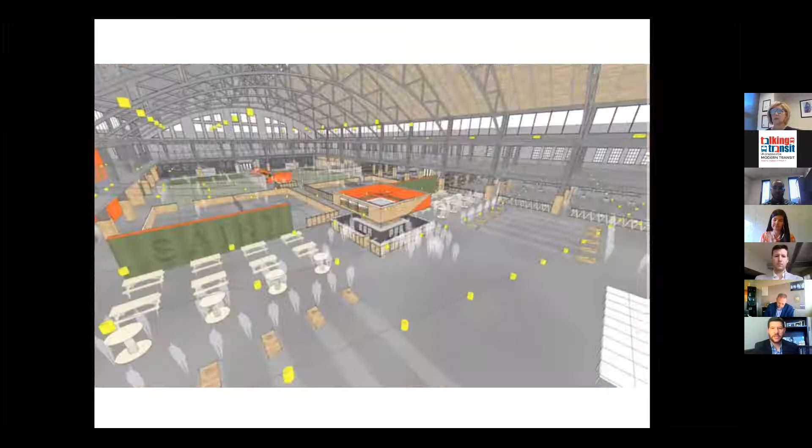To the south of the City Foundry is the Armory building, which had been vacant for some time, but now Green Street Development has already invested $15 million on the exterior with an 80,000 square foot new roof. All the tuck pointing and new windows have been installed. Coming online in 2023 will be Rec Hall, which will feature backyard games and recreational activities, totaling 200,000 square feet.

Here's the latest development announced from Green Street, just to the east of the Armory project. Two new tower buildings, each 13 stories, will be connected to the Grand Bridge and Grand Boulevard, featuring over 500 apartment units. You can see Market Street extending through to those apartment units.

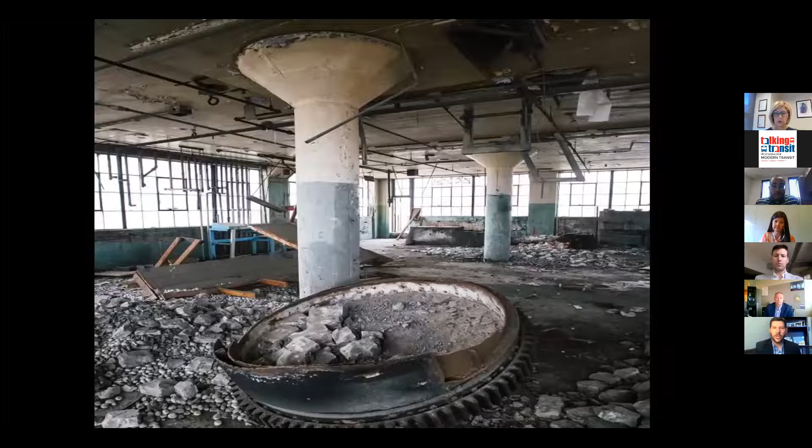To the east of Grand Boulevard is the old Steelcote building, vacant since 1972. This was our first building to actually come online within the redevelopment area, with 33 apartments as part of the Steelcote Lofts. Michael Hamburger with Pier Property Group took on this project and also converted the building to the south into 15 micro unit apartments with 5,500 square feet of commercial space — here are the before and afters of what's been accomplished with those two buildings.

The new construction building is the 3rd phase, called the Steelcote Flats building, which is fully under construction and will come online in winter 2022.

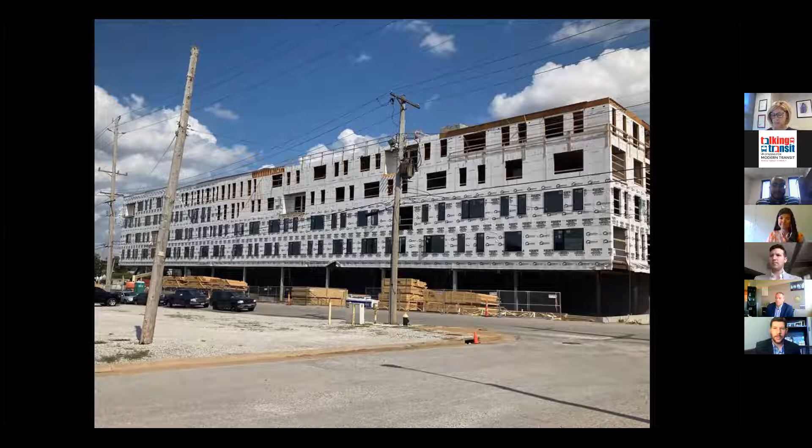Michael Hamburger is just announcing his 4th project in the area, called the Edwin, which will be on Grand Boulevard, right next to the famous Del Taco restaurant on the corner of Grand and Chouteau. It will have 192 apartment units with 65,000 square feet of commercial space on the ground floor.

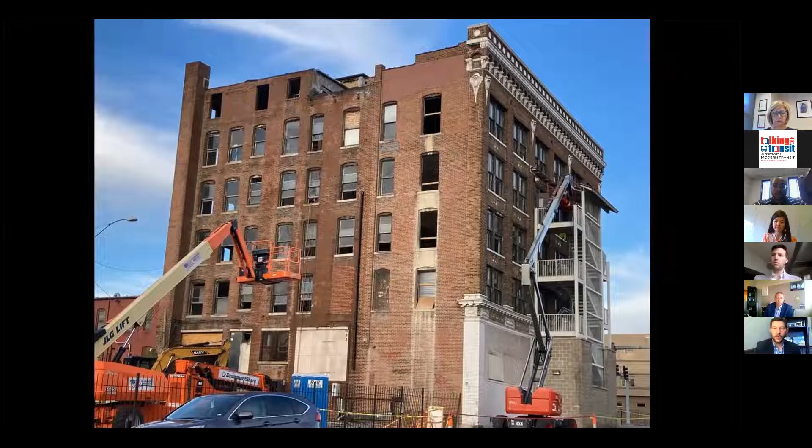Moving southward, this building was able to be saved at Grand and Park Avenue. The Redevelopment Corporation has an outstanding record of historic preservation and being able to save some of these great buildings in Midtown. This is called the Nicholas Building, now fully under construction with the old fire escape removed. It will have 32 apartment units with a ground floor restaurant.

We work closely with the neighborhoods adjacent to the redevelopment area, including Gate District West and the Tiffany neighborhood, and any developments proposed in that area are approved by those neighborhoods. Here's a perfect example: St. Louis University turned over 48 lots in the neighborhood to the community, and the community decided to go ahead with an RFP process, bringing in home builders — Builderama here with 40 new homes and 12 condos currently under construction.

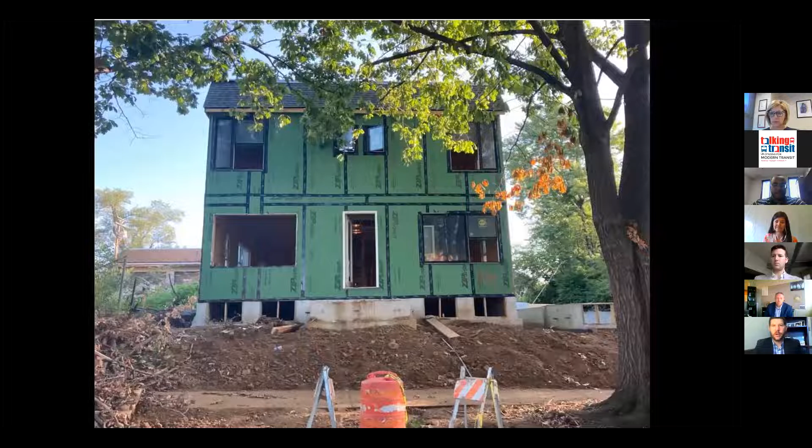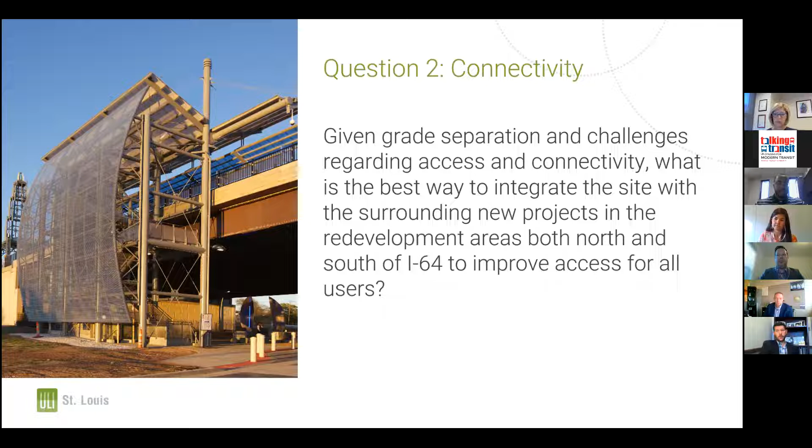Third question is, of course, around land use. Wouldn't be the Urban Land Institute without us thinking about what is the highest and best land use in this area. And so given all these redevelopments and the Redevelopment Corporation's vision to turn this area into a district and give it some sense of place, what are the highest and best uses for this site?

Recognizing that surrounding areas have very unique development character, we were tasked with identifying a redevelopment identity for the site, and then how the site can become an asset for the surrounding areas and neighborhoods, particularly those north and south of the site.

That was something we put a lot of focus on. The last one emphasizes transportation. There's a lot of transportation in this area - we've got Brickline Greenway, the Grand MetroLink station, and the Grand Metro bus, which is the busiest route in the system. So how can redevelopment opportunities leverage those transit assets to create a successful redevelopment for the station area?

So with that, I'm going to turn it over to Toyin to go through some of our considerations as well as the process a little bit further.

Hi. So we started the process off by going over some of the documents provided to the team that discussed what was going on in the area, some of the different projects already in motion, and took all of those things into consideration with our discussion at the end of the day.

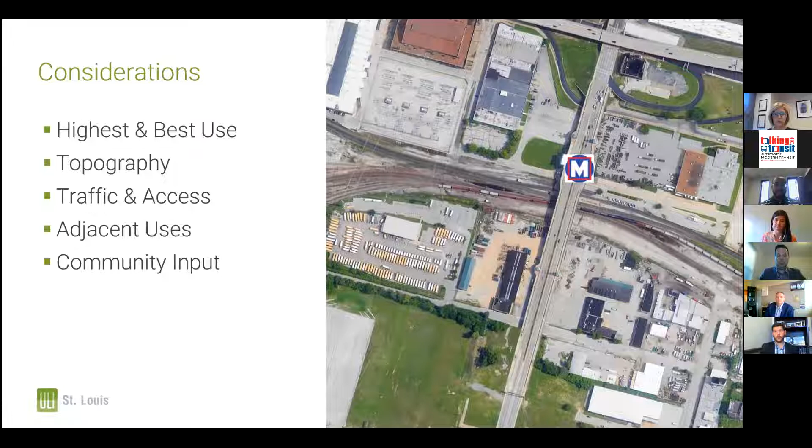A few of our insights were that the area was not very walkable, with lots of fast traffic going up and down Grand. We realized that Grand is a connection point for many transit riders, and that station was going to be really important in relation to what was coming in for the area, both north and south of the highway there.

There was really no great sense of place considering the centrality of the point. Basically, this site didn't offer much to the surrounding area. It was kind of buried, underground or under the highway there, or under Grand, and didn't really offer much to the location around it.

Safety and security was an issue. The wayfinding was really inadequate - when you're at the site, you really don't know what is accessible or how to get there. So that was part of our process as well.

We talked about the connections from the MetroLink stop to the MetroBus and the different points north and south, and how they were challenging to that location.

We also took into consideration increased development attention in the area and the different businesses coming in, and we wanted to make sure they were connected - how we can make sure this site is connected to what's coming in down the line.

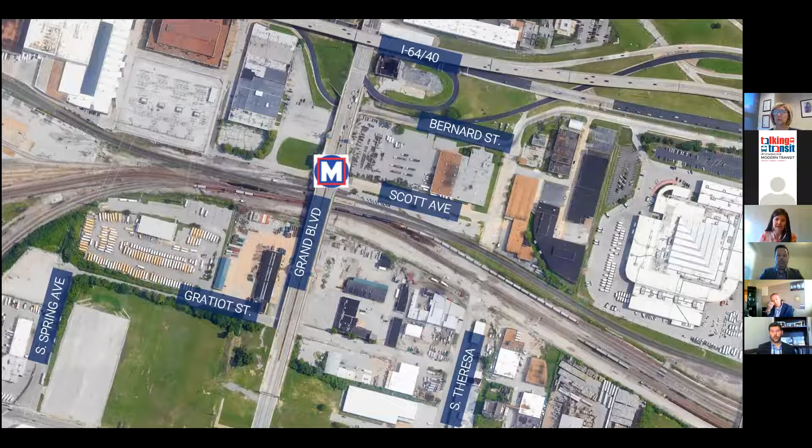A view from SLU looking north towards the Grand Viaduct shows a lot of current green space. We had a lot of conversation about maintaining that sense of connectivity and open space as these sites get developed. You can also get a feel here for the scale of the gap between the Grand District to the north and SLU to the south, and really wanting to stitch these spaces better together.

The MetroLink stop itself has great opportunity for improved wayfinding and overall experience. We had a lot of conversation about wanting to make sure that feels very accessible and approachable, and thinking about ways to do that—the station itself, just thinking about how we can make a more comfortable place for people.

Today, the MetroLink stop really functions just for that kind of transit transaction. We had a lot of conversation about, in between wait times, making these stations—both below Grand and above at the bus stop—much more people places, comfortable hangout places, thinking about ways to incorporate that in the future.

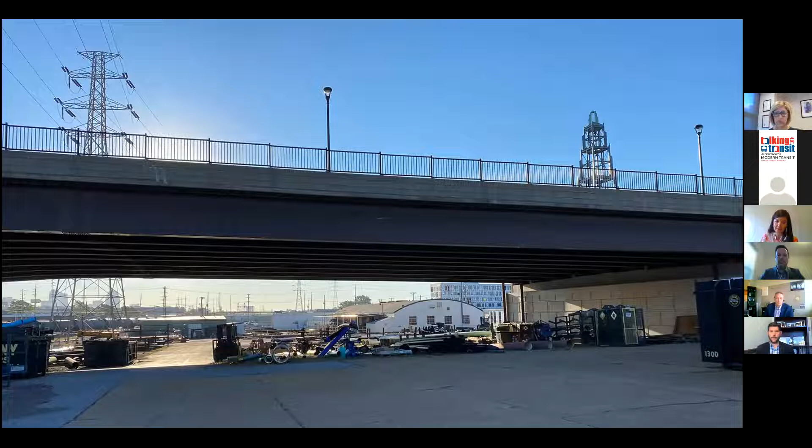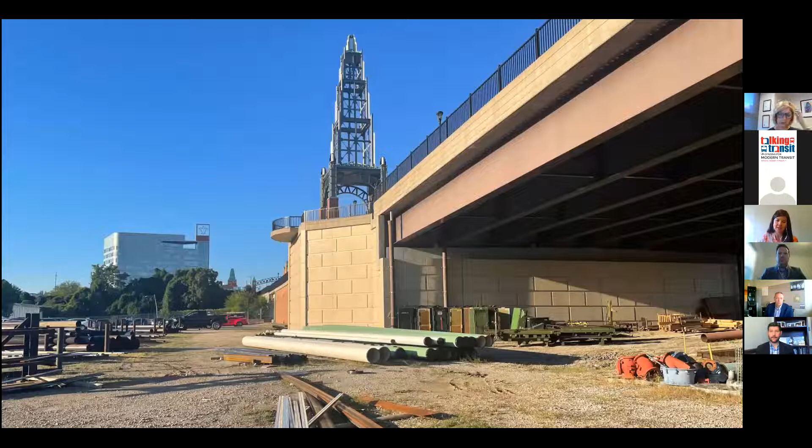This is also Gratiot under Grand. There's a lot of varying uses for the spaces under Grand—existing traffic and transportation connections, as well as some industrial uses, as you'll see in the next couple of slides. Existing landowners use some of that covered area for storage, which is a great alternative use, but we're also thinking about how to better activate those spaces in the future. There's such a significant elevation difference to facilitate the train activity that happens underneath, but we really want to make that a more fluid transition from high to low.

Lots of barriers to overcome, which you will see in our recommendations. In this image, you can see the armory in the far left, currently used as a bus facility substation. There's a lot of existing uses that will continue to stay there over time—obviously the substation isn't going anywhere, the train line isn't going anywhere—so how can we work with those?

The 2012 TAP recommendations—as Chris indicated, the first question the sponsors asked us to answer was what of the 2012 recommendations have been successful or implemented, and what's still viable. So this is our summary of that.

The 2012 recommendation suggested high-speed rail. Our panel is saying probably not. However, there's still a great opportunity to really celebrate this as a transit hub. As we've mentioned, the Grand bus line has the highest ridership in the system, but it still has capacity to grow, and as new development occurs, we're really thinking about how to celebrate this transit hub.

So again, all of our recommendations were centered around how do we increase micro connectivity amongst this site, and how do we make the future experience from where this photo is taken to the other side of the tracks and the highway a much more pleasant and possible experience. There are several different tools that we currently have.

The first is how we're thinking about pedestrians, bikes, and traffic on Grand—opportunities to repurpose lanes, buffer pedestrians, have transit-only corridors or bike paths. How do we increase the options for different uses and transportation modes safely along the Grand Corridor, capitalizing right now on the existing high-capacity Metro bus, with Grand being perhaps the highest capacity and ridership in the Metro bus system.

That is, I think, in a city that does not necessarily have as extensive of a public transit system as we all might like. How do we capitalize on the highest use corridor today and continue to invest in that infrastructure, encourage use and support along that line?

We want to enhance the pedestrian grade change vertically, as I've mentioned before. You can see on the right some very interesting activations with both ramps for accessibility to all people, as well as a place to hang out and practical steps to transition between grade changes. Interventions like those really increase both the aesthetic, the access for all, and the very practical change between grades. Pursuing ramping, different kinds of interventions in that way, to integrate with the Brickline.

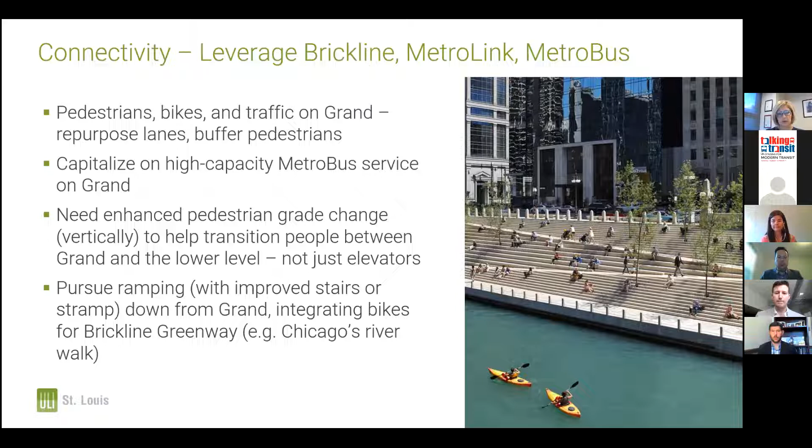Thanks, Chris. I'm wondering, we should have set an over-under for how many times we would say the word connectivity for this, because it's so important, obviously, from a mobility standpoint, but also when we think about land use, identity, and equity of this area. Connectivity was that central theme. We spent a lot of time, as Brooks said in his introduction, there's a lot going on here. There's a lot of momentum. There's a lot of opportunity. So we spent a really big part of our time thinking about what is this district, collectively.

There's a lot going on individually. How do we connect it both physically with the improvements that Will was talking about, but also through land use? Is this a district that could become a place that somebody might want to live, and maybe live throughout their lives? Is there a way to be intentional about creating elements of this district that are intentionally mixed income, intentionally multi-generational, to allow people to live and not necessarily have to move, to be able to stay within the district and work and recreate and live? So we spent a bit of time thinking about what that could look like, and where we might be able to bring residential in here.

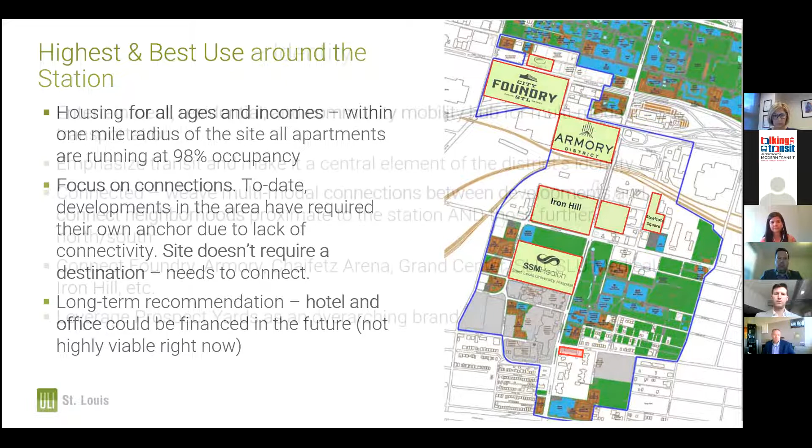When we thought a lot about identity, we just decided to go all in and embrace connectivity as that identity for this area. Brooks and Bonnie and everyone has been talking about all of the assets that are here and that are emerging with the Brickline. So how do we embrace that and say, this site, this Grand MetroLink station, the area right around this, make it a community mobility hub? How do we say, this is an area where we want people to come from the region to this area, and then have the micro connectivity that Will talked about, that once you get here from that regional perspective, how do you then connect throughout the district? And really embrace that, I think, is something that we wanted to emphasize.

We were talking about how these connections are not just connections within the development itself. We think that's critical, and even from a land use and development perspective, it opens up opportunities, I think, on the existing opportunity sites to not have to have their own destinations.

They can be that connecting point outwards, but also not just internal connectivity - how do you get north and south? How does this become not only a focal point for the district, but for adjacent neighborhoods to say there's assets here - there's places I want to go, the food hall, the foundry, the armory, places I want to go to when I come here.

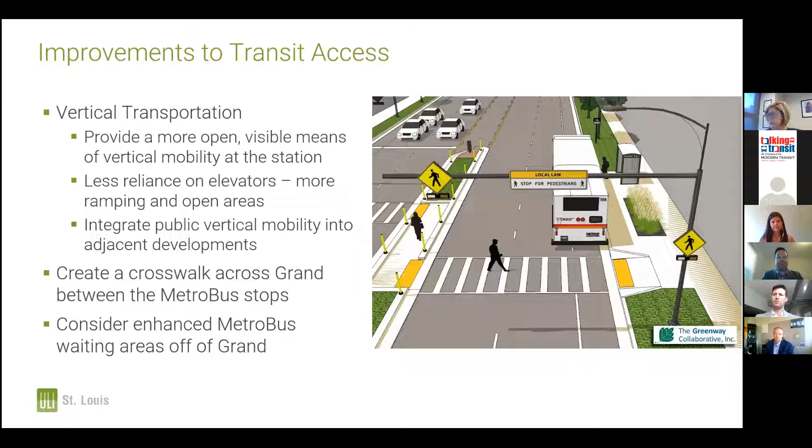To create those more hospitable waiting areas. And then we think there's opportunities for improvements at the station level itself. We think it lacks placemaking features. So we're thinking things like overhead LED lighting, public art, perhaps some sort of water feature that takes advantage of the grade difference to have some cascading type of water feature.

So just anything that can help define a sense of place for the lower level station. Restore the lower level street grid. We think there's going to be an opportunity for this. There's a lot of disjointed streets in that area. So we think that's another opportunity.

Metro has a small parking lot in the area. We don't believe commuter parking or park and ride to be a key ingredient to the future success of this area. So we think if there's opportunities to better position that property for a better use, we should go ahead and take advantage of those opportunities.

And then lastly, integrate the Brickline Greenway. We know the Brickline Greenway is going to be coming to the Grand Station, so let's figure out how to integrate that into everything else we're talking about. There needs to be a component of the vertical mobility that speaks specifically to bikes and getting Brickline Greenway folks from down below up to Grand, and maybe even providing services for bikes.

That could be part of the convenience-oriented neighborhood services we're looking to bring to this community mobility hub. In addition to having the fruit stand or vegetable stand or coffee shop, let's look at having potential services for bikes, so that as bicyclists are coming through, if they need repair services, that could potentially be part of the equation.

And then north and south of the station, we've talked a lot about that. We really need to encourage the multimodal connections from this new community mobility hub station area to all the different things happening around it, whether it's Foundry, Armory, Chaifetz Arena, SLU's main campus, or SLU's medical campus. We really need to look beyond just the station at how those connectivity improvements extend north and south.

So we do really think something needs to happen at Forest Park Avenue and Grand. That intersection's been studied for some time. Creating some sort of fix there we think is important.

On the south side, Bonnie mentioned the lack of vertical connectivity between Grand and Gratiot. That's really going to be important to serving those developments happening just south of the tracks, and giving those folks an opportunity to get north and walk to the station.

And then we mentioned that MoDOT is embarking on a study of the I-64 corridor, and they're looking at reimagining interchange configurations, potentially jettisoning excess right-of-way. So we think there's really an opportunity to partner with MoDOT, work with them through that process, and look for opportunities for new developments as well as restoration of multimodal connectivity coming out of their efforts. So that's a really exciting thing that's happening.

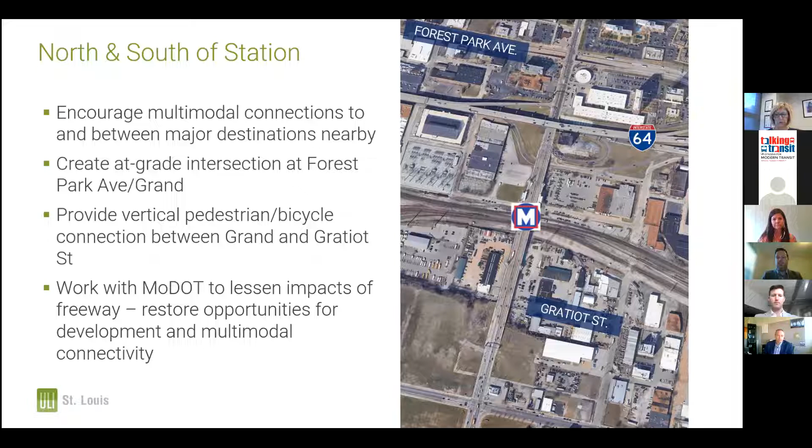So I'm going to turn it back to Justin to just key on our development recommendations before we close out.

When we think about cohesion of this district from a land use and development perspective, we were talking about creating, having the Redevelopment Corporation create, development guidelines, really define what they want this district to be, establish criteria to be considered as new projects are coming forward for consideration. Part of that also might be considering implementation of a form-based code to pull all of that together from a district standpoint.

We've been talking a lot about connectivity, and I think Will kind of introduced this whole regional concept, local concept. We really talked about that from the standpoint of local connectivity needing to be supported and enhanced by the developments as they come online, requiring those developments to prioritize transit, biking and walking over cars for district mobility, but then also recognizing there's a regional attraction here.

So people are going to still drive to this area, drive to the anchors and the destination points. So maybe consider having a parking management system district-wide that allows the different developments to share parking at different times because of the different uses, and really try to lessen the need for parking at individual sites as the district continues to grow.

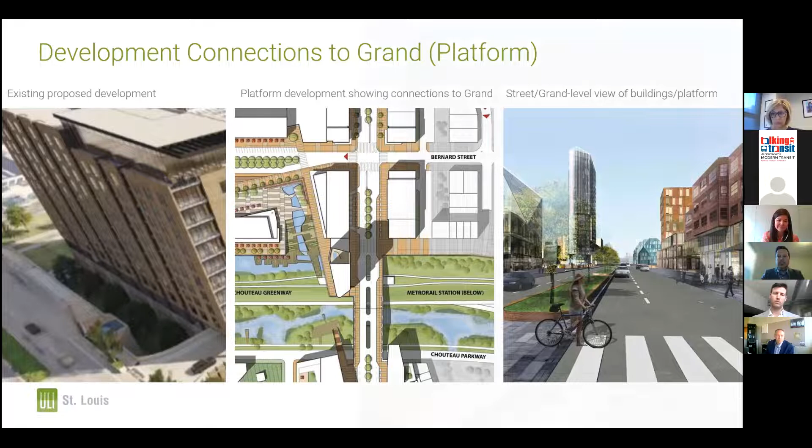Fantastic, thank you all. So we really feel it's time to connect the dots — that this district is about leveraging all the assets here, all these entertainment destinations, all these residential developments emerging, but creating, as Will said, that micro connectivity to make sure this district has a sense of place. We believe that's really going to help create additional momentum for further development. And so with that, we would gladly take any questions you all have.